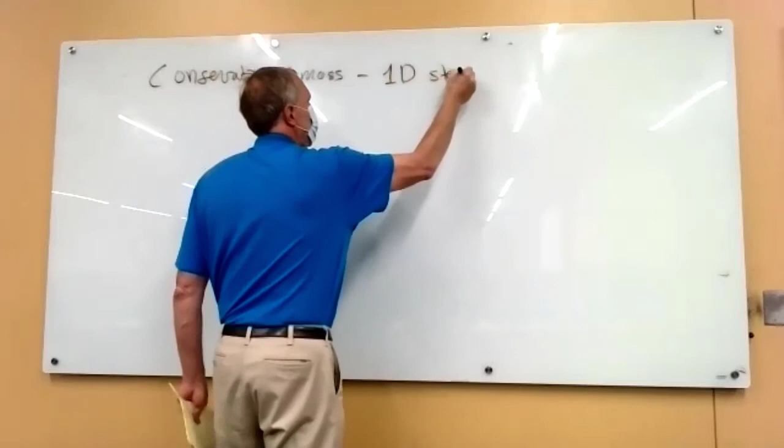We had the conservation of mass. So that was our first fluid flow equation. Remember, it's one-dimensional steady state flow. Why is it 1D? Because the pressure and density only change in one dimension as it goes down that pipe or that duct. Why is it steady state? Because they don't change in time. So this says rho at one point is equal to the same thing at another point.

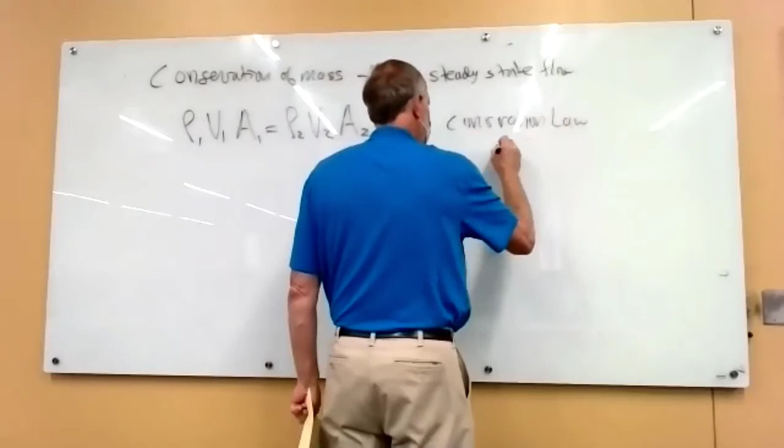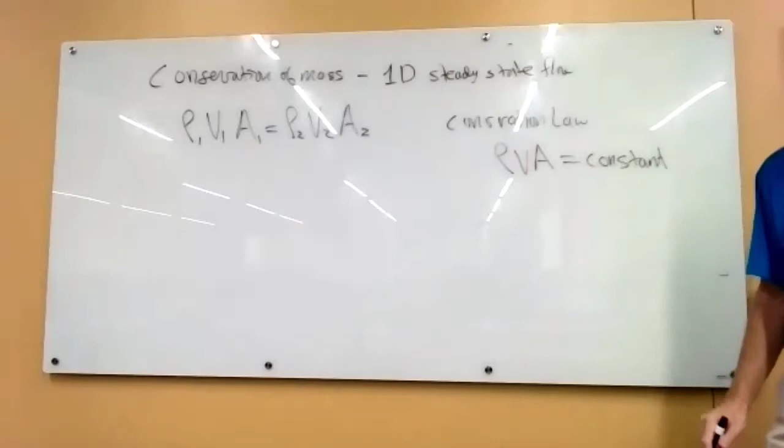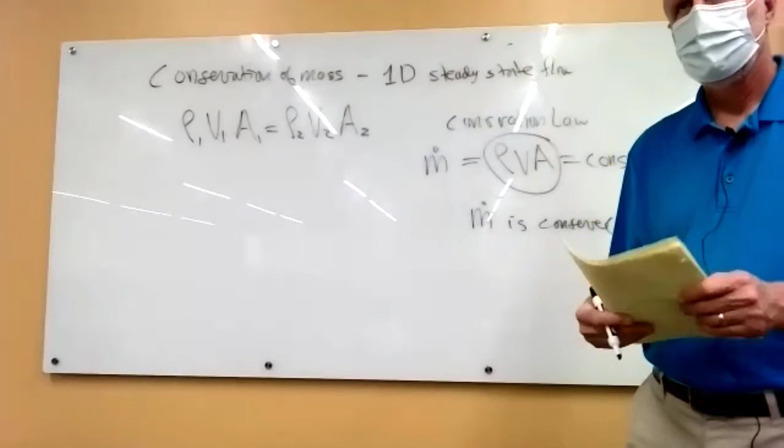Or you can think of this as a conservation law, because it says anywhere in the flow, this combination of variables is constant. So when you multiply all three of these together, that quantity, which is mass flow rate, is conserved. And that's why we call it the conservation of mass.

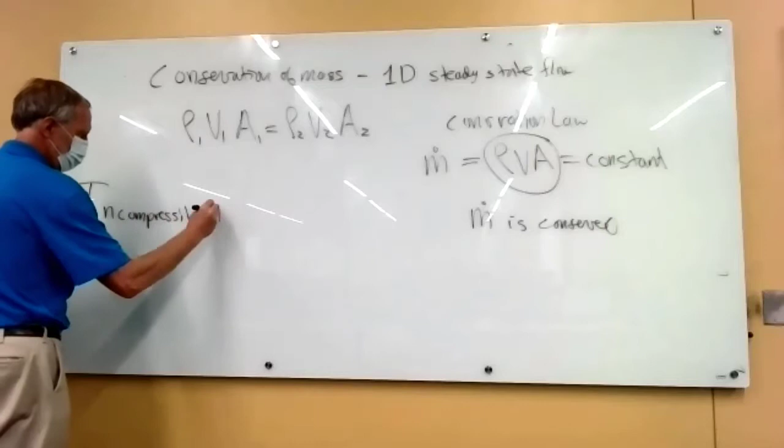And then the next assumption is we can say incompressible flow. And you may think, well, gosh, I got to keep track of all these assumptions. Again, like I said last time, you got to pick the right equation for the right situation. And so you need to state the information that led you to choose that.

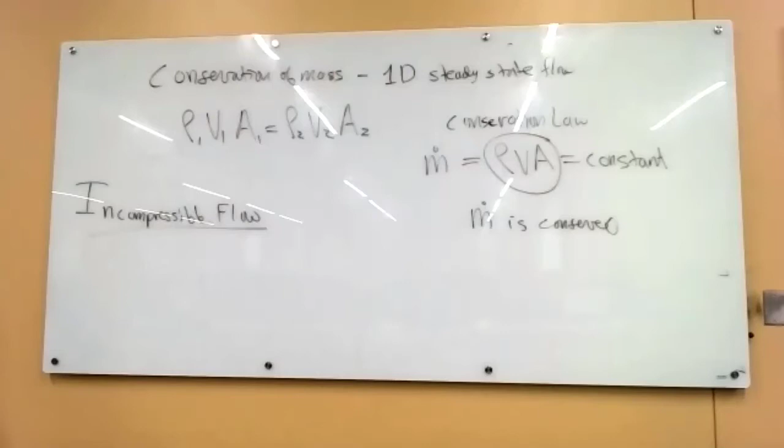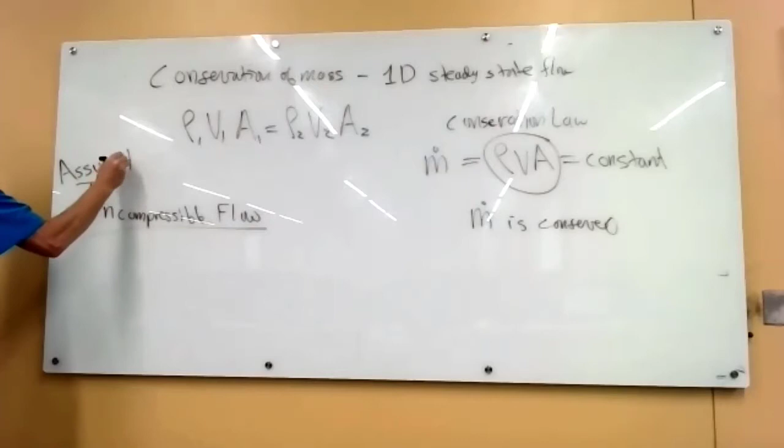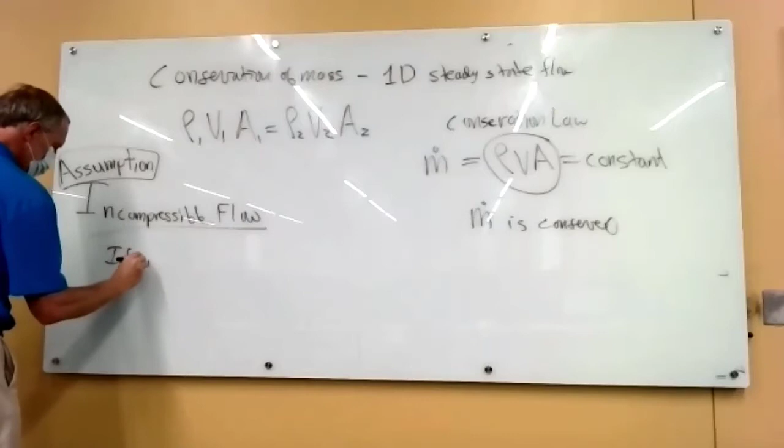All right, so this is another assumption that we can make. And the idea here is that if we squeeze a substance, which really means if we put a force on it. How about if that substance is steel? This is a steel beam. I'm pushing on it. Is it changing its shape at all? Is it compressing? Well, actually it is, right? But I'm probably bending this a negligible amount. So we could assume that this force on this beam is so small compared to the elasticity of the beam that it's not really deflecting at all. So steel, if we had a cube of steel, imagine how much force you'd have to put on that steel to compress it down. Because it's in a solid form, so all of the atoms are linked in that crystal structure. You actually have to physically push the atoms together, and it's really hard to do because the electrons are shared between each of the atoms. And so this is hard to compress.

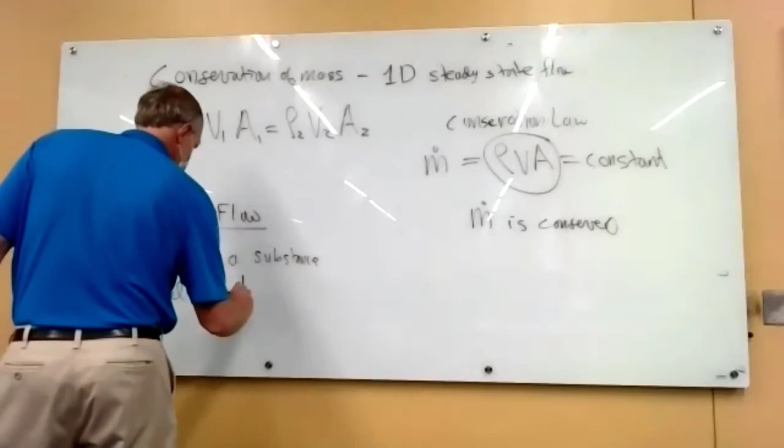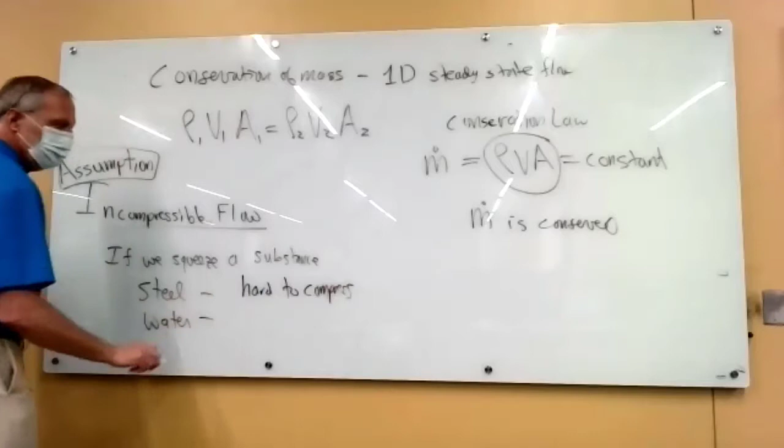How about water? Still not very compressible. It's a liquid, but even in its liquid form, the atoms are pretty close together. And so to push those atoms even closer together takes a lot of force. Can't say it wouldn't happen. In steel, you can compress it, put it in the interior of a star, it heats up, it melts, you can compress it. Still hard. So if we're having a problem where we're dealing with an airplane, which would really be a submarine in the water, we could pretty much assume incompressible.

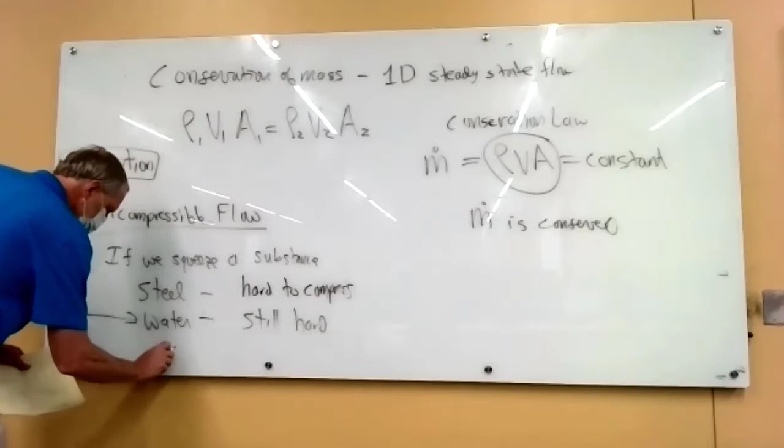Okay, how about air or gas? If you take a balloon, imagine going to Party City, one of those Mylar balloons. If you push on it, it wiggles around, but how well could you compress that down into a volume half its size? It would still take quite a bit of force, wouldn't it? You could do it because the gas is more compressible, so you need large pressure forces. So we have to make a decision as to when do we have to say a gas is compressible and when do we say a gas is not compressible?

And the whole idea here is that if we can say the density in this equation is constant, then that's an unknown that we can throw away. We don't have to worry about it.

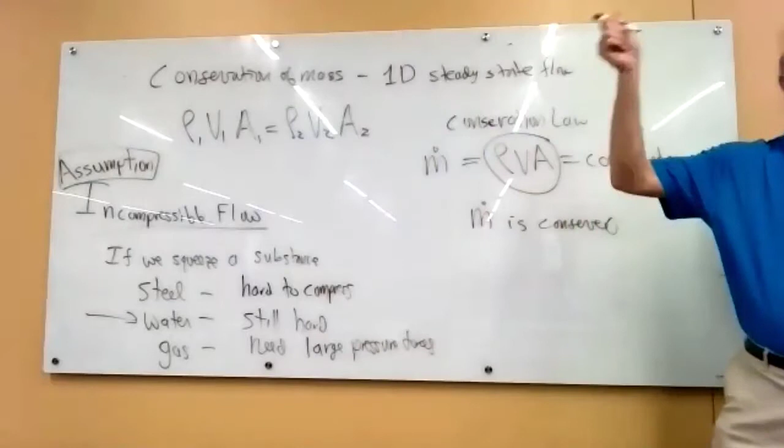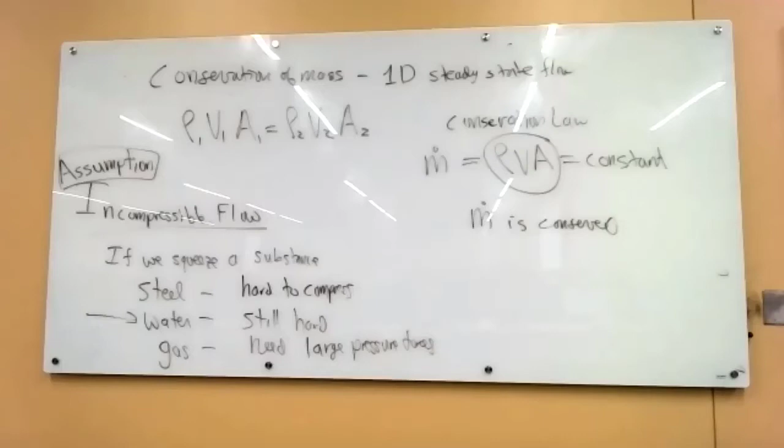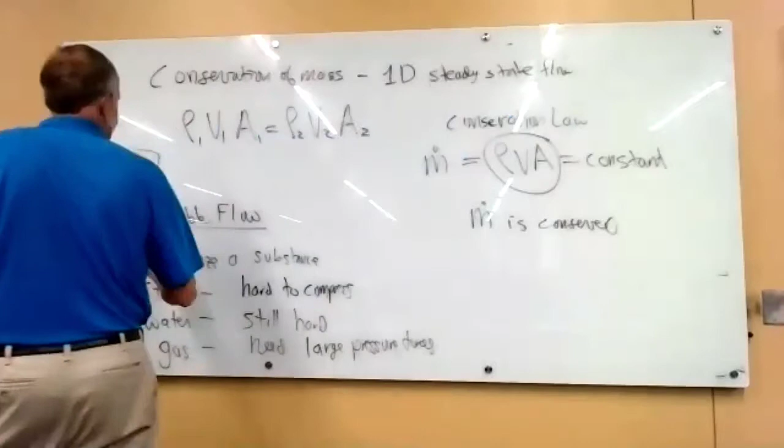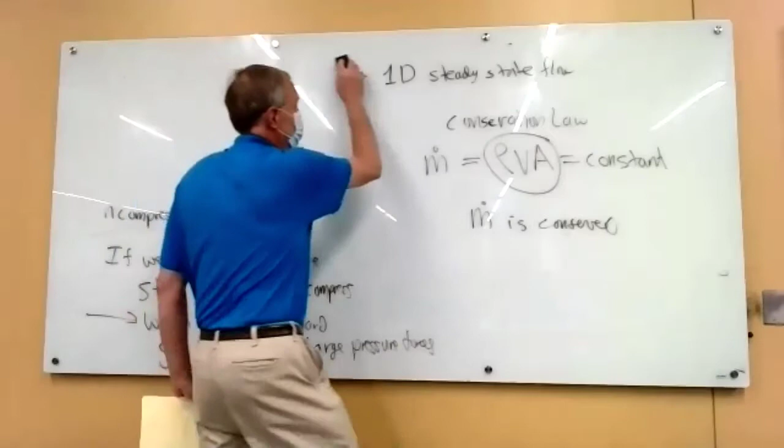All right, somebody tell me where I put my eraser. Oh, geez. You know what this whiteboard really needs? The tray on it, right? Maybe I should buy one. Go to the department and say, I need a tray. It'd make it look less classy. So who should I blame for buying these whiteboards that don't have trays? No, actually, I did it. Some of the other teachers that teach in here wanted whiteboards, and these looked really cool. I just didn't notice that they didn't have trays. So I need to fix that.

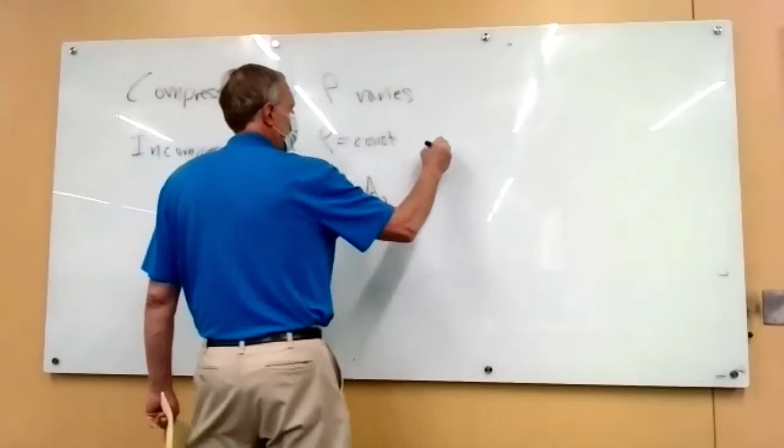All right, so if we have compressible flow, then rho varies. Whereas incompressible, rho is constant. So in that equation, we can say rho 1 equals rho 2, and we can cancel. We don't just write the equation down without rho in it. I want you to write this equation down, and then if you assume incompressible, write 'assume incompressible flow,' and then cancel the densities out, so you remember you did that. Not only that, but you remember this equation, so if you ever have to do compressible flow, you don't accidentally get the wrong equation.

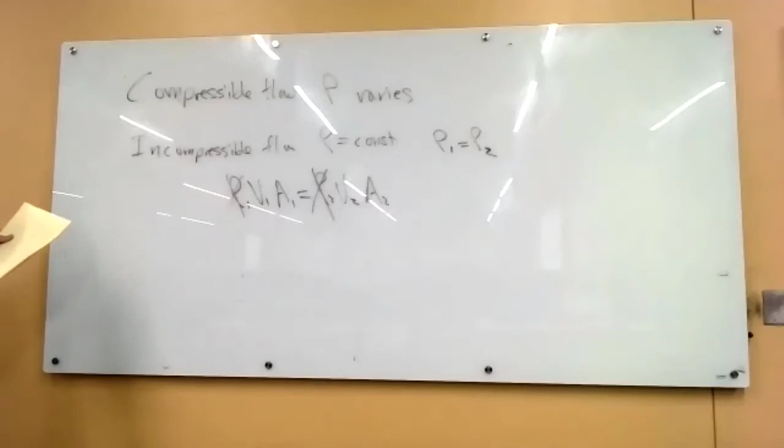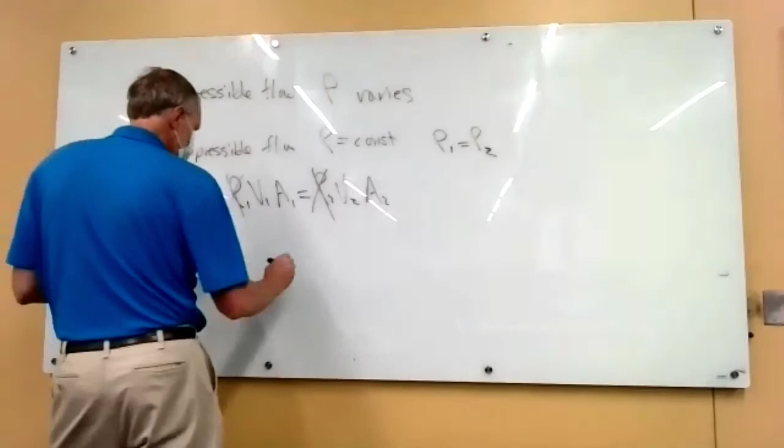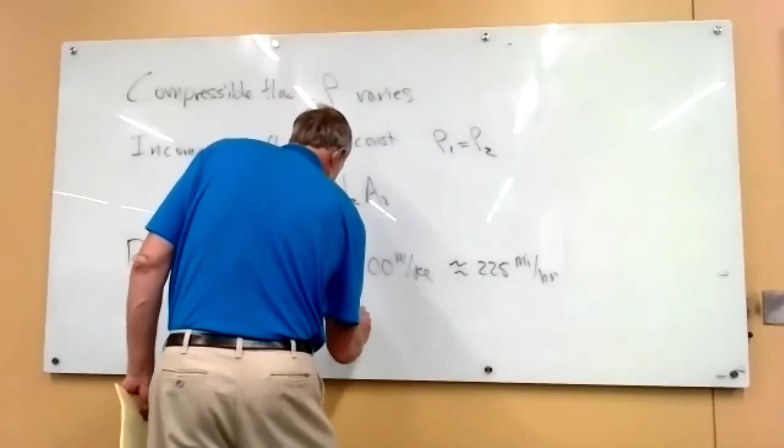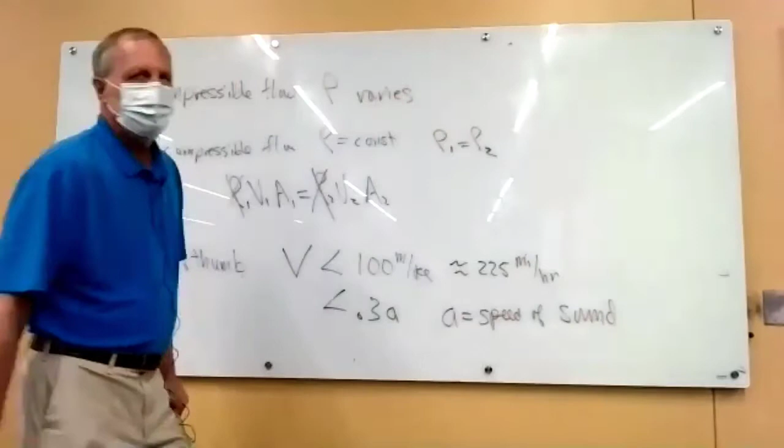All right, so the rule of thumb, and we'll justify this later, is if the velocity is less than 100 meters per second, that's easy to remember, 100, right? A century of meters per second, or about 225 miles per hour. And all of these are really based on them being less than 3/10 of the speed of sound. And why the speed of sound? The speed of sound is related to pressure disturbances. So this is related to how much speed you have that can compress the flow due to the pressure forces pushing in on it.

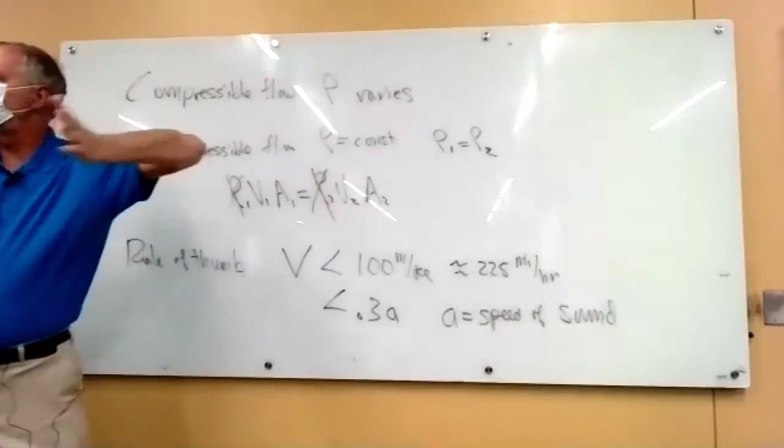All right, how are we doing on time? 12:58, I see it on the computer.

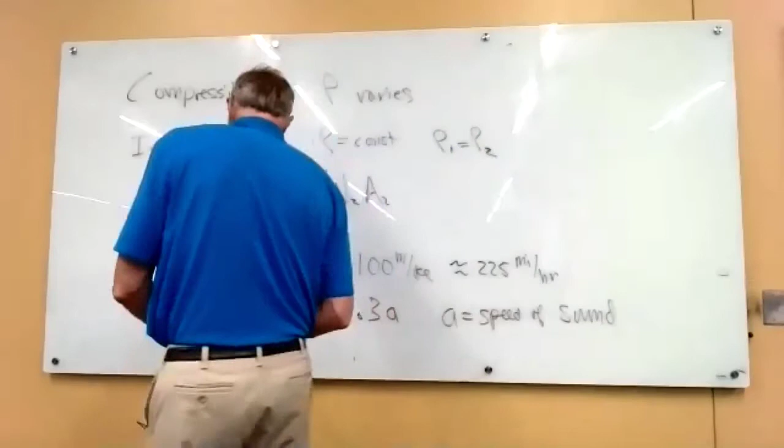So these are definitely worth memorizing, because these are kind of the cutoffs. If you get higher speeds in your flow than those numbers, then you have to assume compressible. If it's below that, this is really what could be called low speed flow.

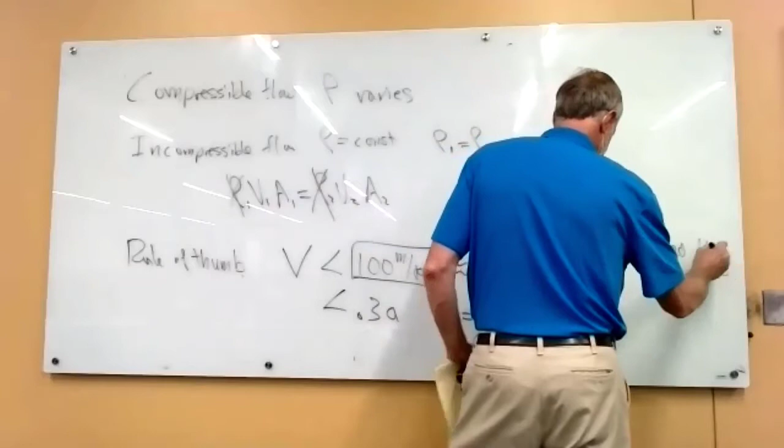All right, so let's do an example that everybody has done experimentally. Everybody have a garden hose now, or grew up in a house where you had a garden hose? Right, so you turn the water on, the water shoots out the end of the garden hose, and it's not real fast. If you want to wash your car, what do you do? Yeah, you put your thumb on it to make the hole smaller, or you buy a mechanical device called a nozzle, that takes the diameter of the tube and narrows it down.

And from conservation of mass, we know that if the area goes down, then the velocity goes up. So that's why the nozzle is there.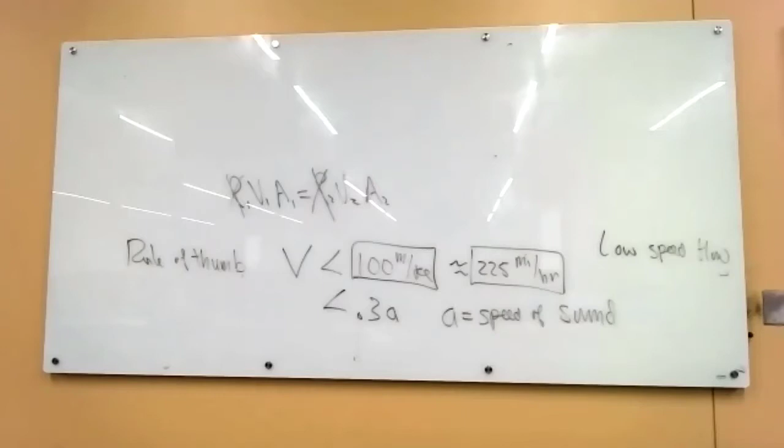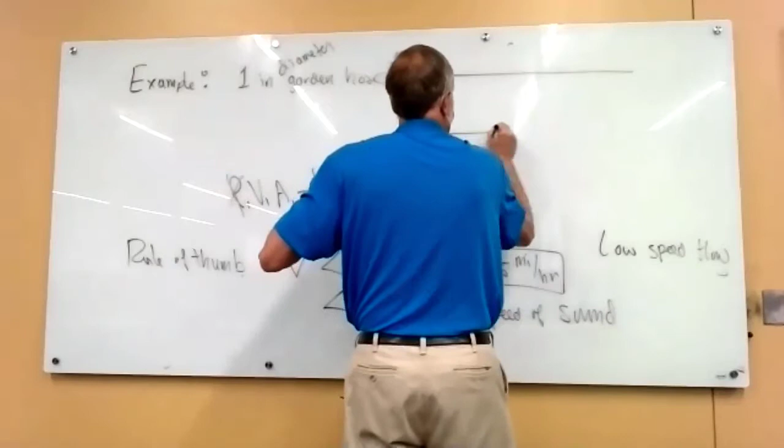So here's an example. This is a pretty small nozzle. So, 1-inch garden hose, 1-inch diameter, or a 1/2-inch radius. And the reason we need to know that is we need to know that area that's going to go into our formula. All right, and it has a nozzle. So here's our garden hose, this is 1 inch. And then the nozzle goes down, and this has a diameter equal to 1/8 of an inch.

So typically in your book, the problem will be written like this: you have a 1-inch diameter garden hose that you bought at Sam's Club. It's the Members Mark brand that says it's kink resistant and kink free. And you get it home and you put it in the front of your house and it kinks up all over the place. Does that sound like something I've done? Yeah, I have a hose and the thing kinks all the time. Okay, so the problem doesn't include all that other stuff. It says a 1-inch garden hose that has a nozzle put on the end that's 1/8 inch in diameter.

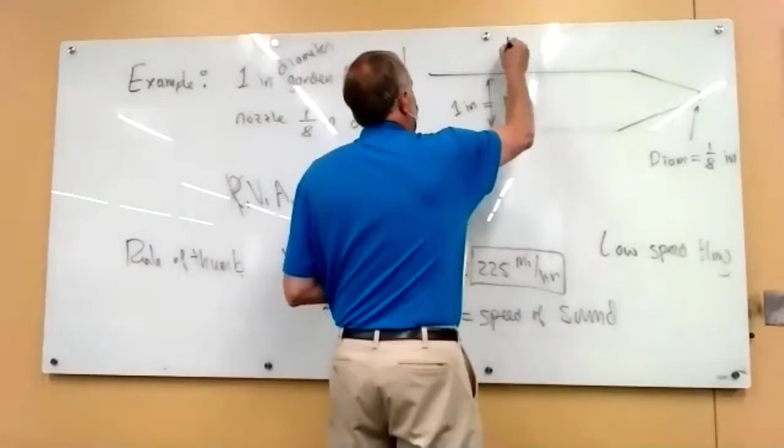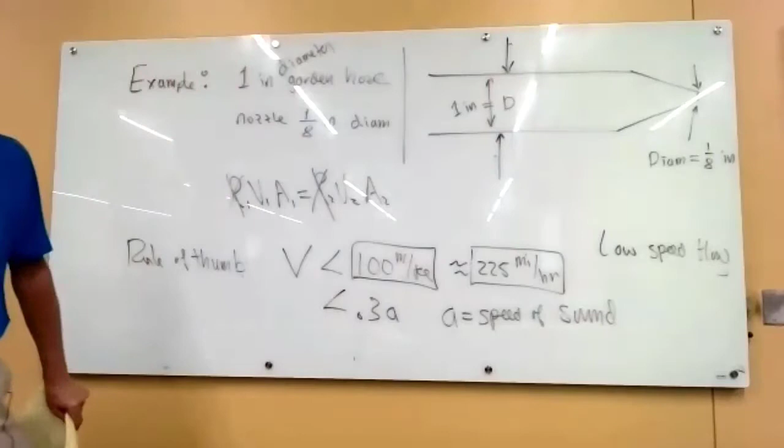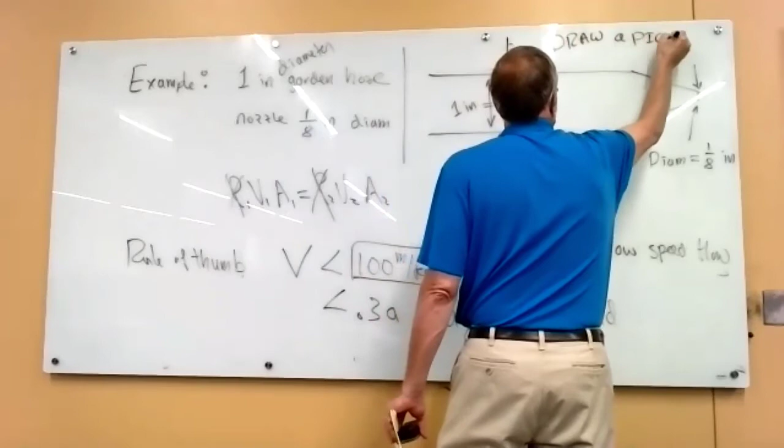What did I do over here to the right of that? What is this? It's a picture or a figure, right? Just like in dynamics, you drew free body diagrams. In this class, draw a picture labeling the different points in the flow where you know stuff. And that helps you think about the problem. You look at the flow, you look at the areas, and you go, oh yeah, I think I'll use conservation of mass. So in the homework, whenever you're given a word problem like this, draw a picture. And I will actually grade that. I will look for the picture and give you points for drawing it.

Now, we haven't done that up to this point because the homework you're working on now says at a point in the atmosphere, the pressure is this value and the density is this value. I guess the picture that you could draw would be... right? And so I haven't really emphasized drawing pictures yet because we haven't started talking about flow going through things. But if you can at all draw a picture, draw a picture.

All right, what's the fluid? I haven't said, have I? Liquid iron. Compressible or incompressible? That's going to be some serious garden hose if it can handle liquid iron, right? What was your idea? Grape juice, so that works. So, I mean, that could happen, right? We're at a winery and they have a tank filled with grape juice and they need to transfer it to another tank to make wine.

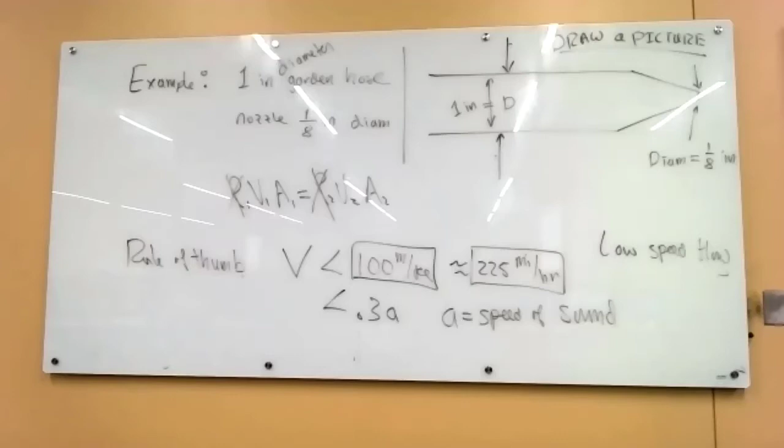So I haven't said, so we need to know more information. This is going to be a garden hose, so you would almost assume that it's hooked up to the city water supply, although not necessarily. It could be mercury, that would work, it wouldn't melt the hose like the liquid iron would. Well, what would you use? You'd have to use like a ceramic or some other metal that would not melt at the temperature of liquid iron.

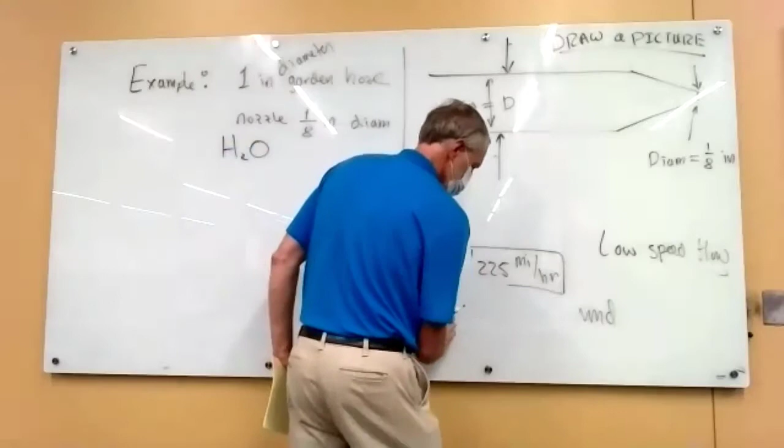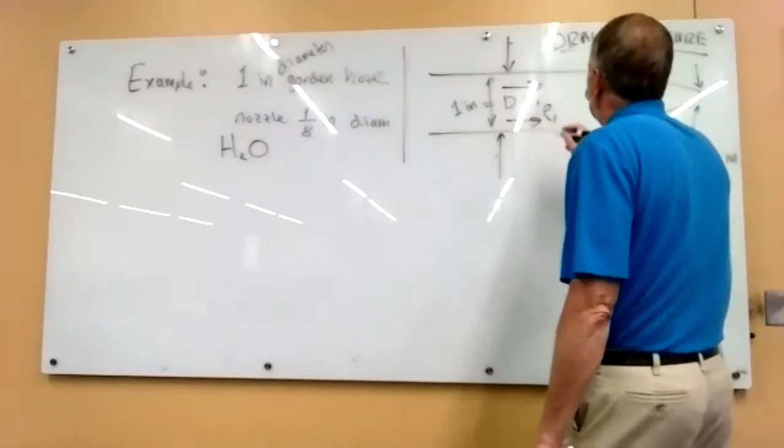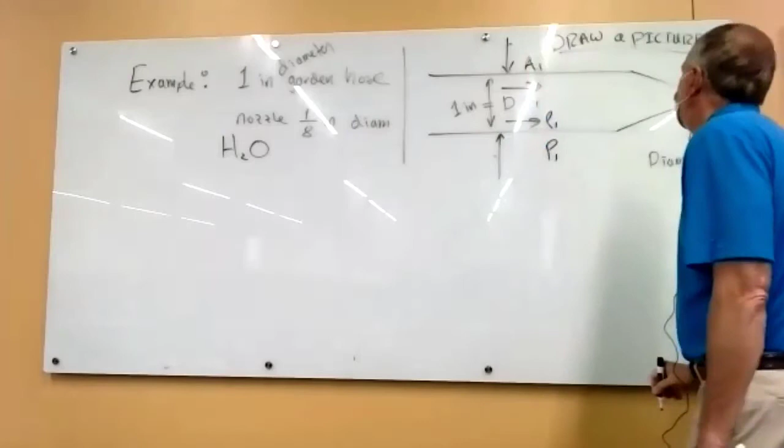All right, so we look at this and we go, okay, it looks like we're going to say that the flow velocity V1, Rho 1 is here, and there's going to be an area A1 here. So I'm starting to label the variables that I need. These are the fluid variables. I have a velocity, a density, a pressure. And then over here we have a velocity, a density, a temperature, and a pressure.

So what do we want to do with this? Well, right now it's not stated in the problem, but what we want to do is find out how much faster, oh whoa whoa whoa, there's not ones over here. How much faster is the velocity here than here? How much speed up do we get? So we want to find the ratio of V2 to V1. So that's the problem.

So we draw the picture. We label the flow variables. Well, there's some flow there. There's some density, pressure, area, density, temperature, pressure, area. We want to know velocity differences. What do we know in this problem? I haven't given you the pressure, the density, or the temperature. So what do we know or can we calculate? We can find the areas, right? Because I gave you the dimensions here.

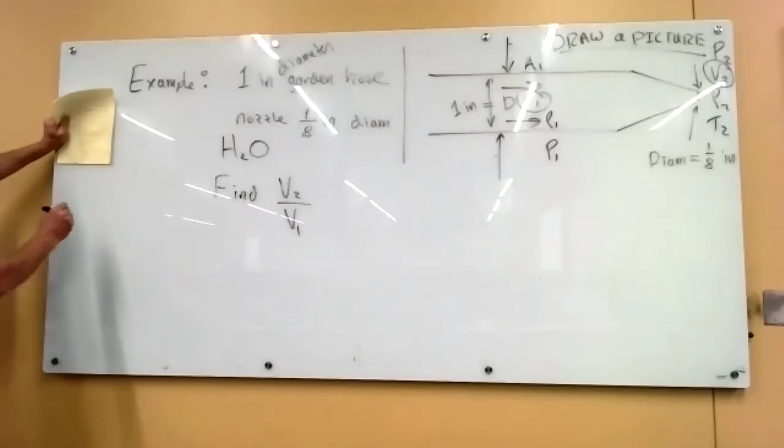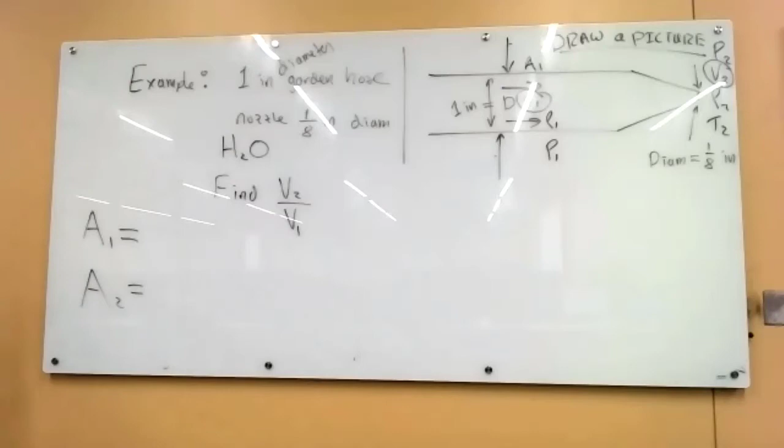So you guys do this. What's the area 1? What's the area 2? I guess we ought to decide what units we want to use. It's given in inches, so let's find the area in inches squared and see if we're going to be okay.

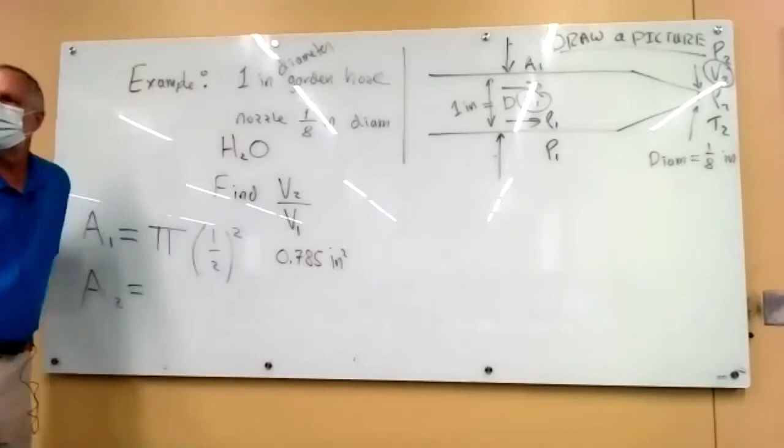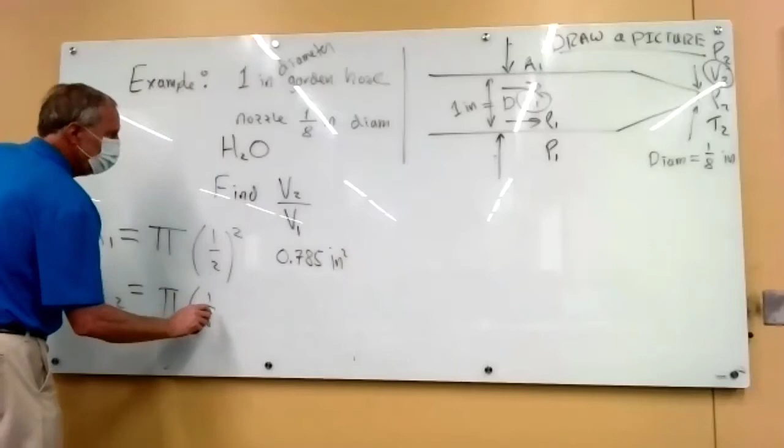0.785. Do I understand you right? Did I hear that right? Okay, how about the other area? It's going to be pi times 1/8 divided by 2.

So what do we get there? You have to shout it out loud. 0.012. Did you guys all get that?

Is that good? All right, so we know areas, and then we go, all right, what equation do we know that has areas in it? How about ideal gas? P1 equals rho 1 R T1, that's really the only equation we know so far, right? That we've used. No, I don't see area in there. I see pressure. I don't even see velocity, so that's a bust.

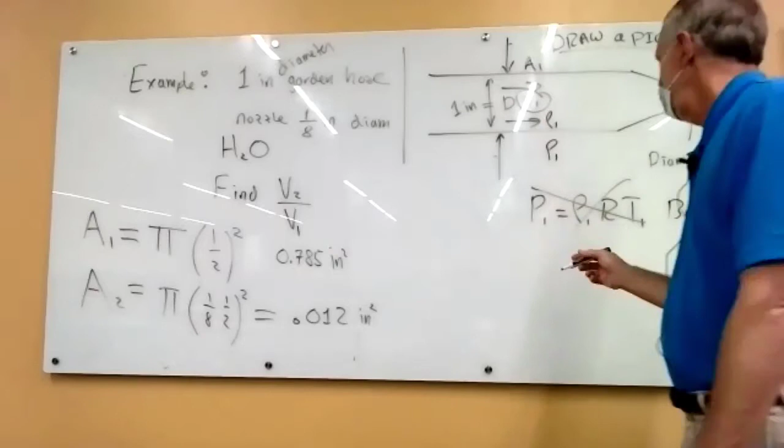Then we go, yeah, conservation of mass. That has area in it, and it has velocities, right? Rho 1 V1 A1 equals rho 2 V2 A2. Assumptions, 1D steady.

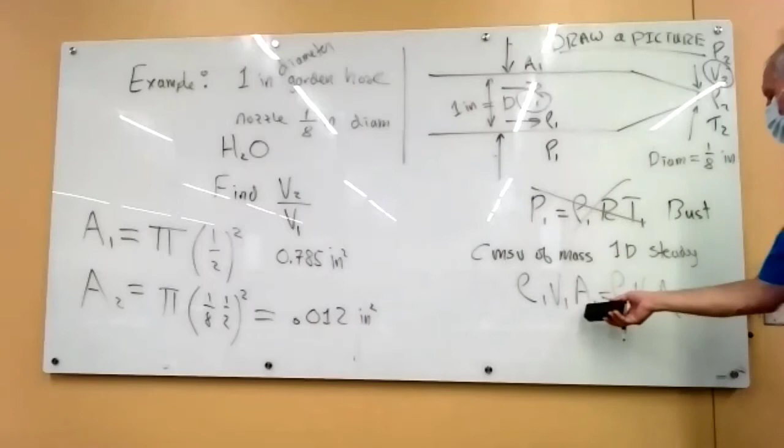Now we go, okay, I want to know V1 and V2. We're looking good. There's V1 and V2. We know A1 and A2, so we can check those off. We know that, and we can solve for this ratio, but I don't know the density.

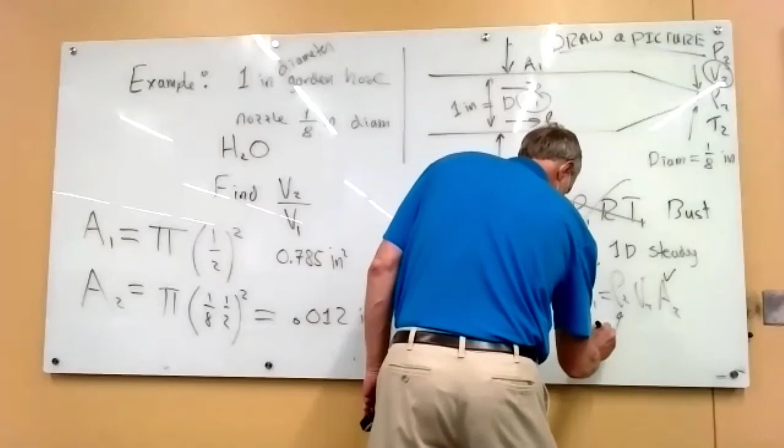So I'm going to assume an incompressible flow because it's going to make the problem easy, right? No, the reason we assume incompressible flow is that it's water. So you have to say that, assume incompressible flow, which means that rho 1 equals rho 2, so you can cancel those out.

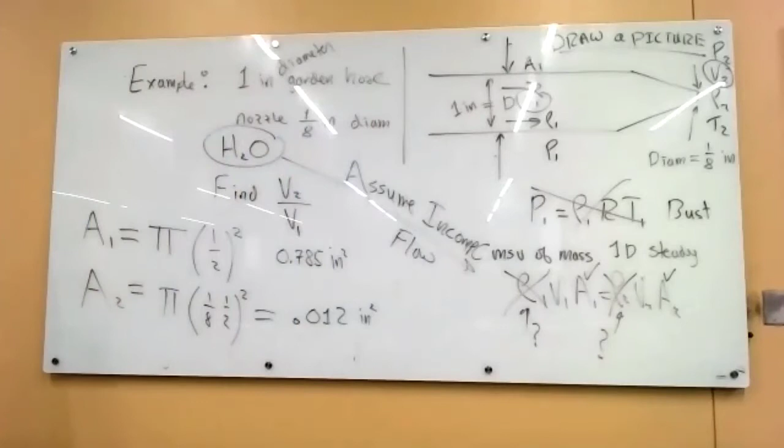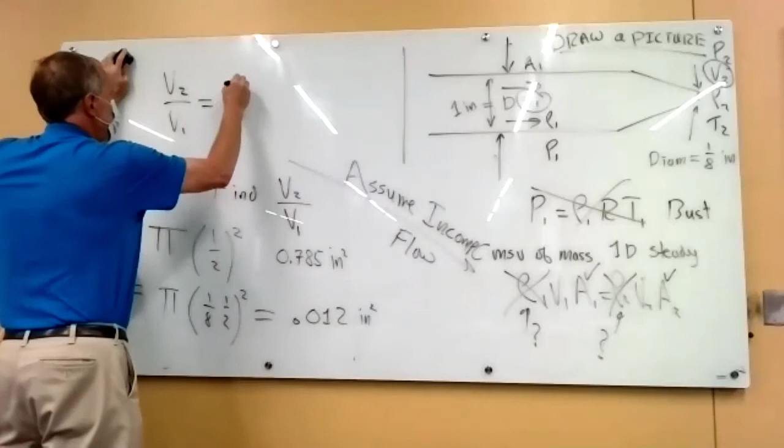So all that's left to do now is just ratio these two numbers. So what do you get? Somebody punch that in. So V2 over V1 is, it's going to be A1 over A2. So what do we get? Somebody have that?

That's because I solved that equation. I moved the V1 over there, the A2 over the other side. Actually, I can calculate the answer. I made you do this stuff, but we can actually just ratio these two, right?

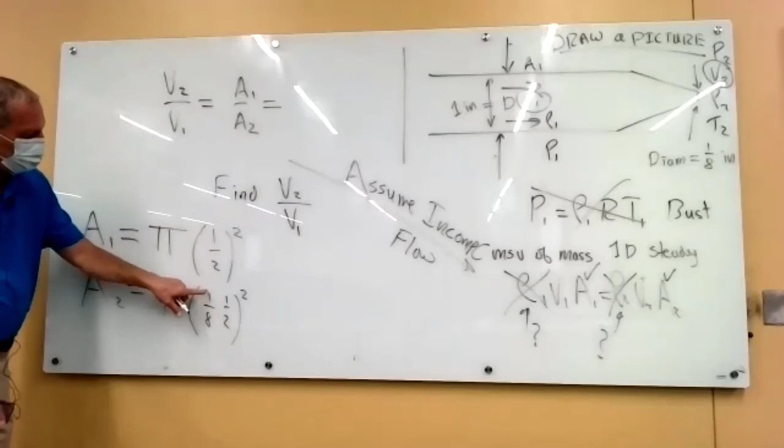And the 1/2 cancels out with the 1/2, and we get 1/8 squared. So it's 64. So that's decent. The flow coming out of the nozzle is 64 times as fast as the flow coming in.

So that's how you use conservation of mass with the assumption, and then you can solve a problem. So what is the value of V2? How fast is the flow coming out? I need to know V1, right?

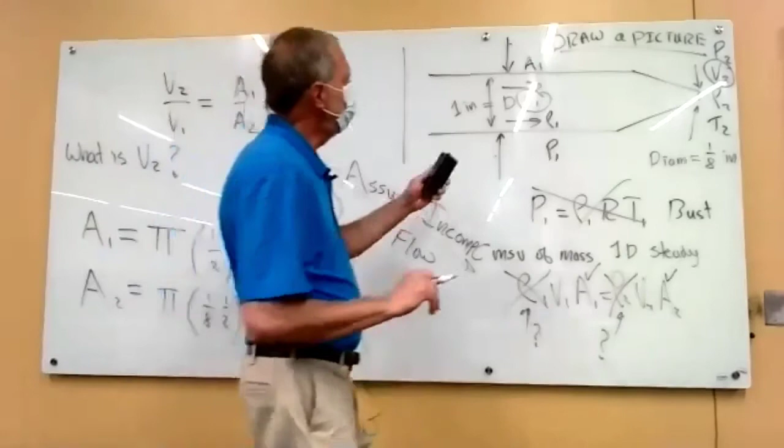So how does this problem, how is it going to know V1? So there's a change in velocity. We're saying the velocity here is a lot faster than the velocity here. So if I have your car and it goes from 10 miles an hour to 100 miles an hour in 10 seconds, what causes that? Fundamentally, physics. Acceleration from what? A force, right?

So looking at this, the velocity goes 64 times as fast. There's got to be a force causing that. What's the force? In the fluid problem, there's not a 250 horsepower engine driving this, right? Like a car. There's not a jet engine. What is the force that's going to drive a little piece of fluid right here down the pipe and go screaming fast out here?

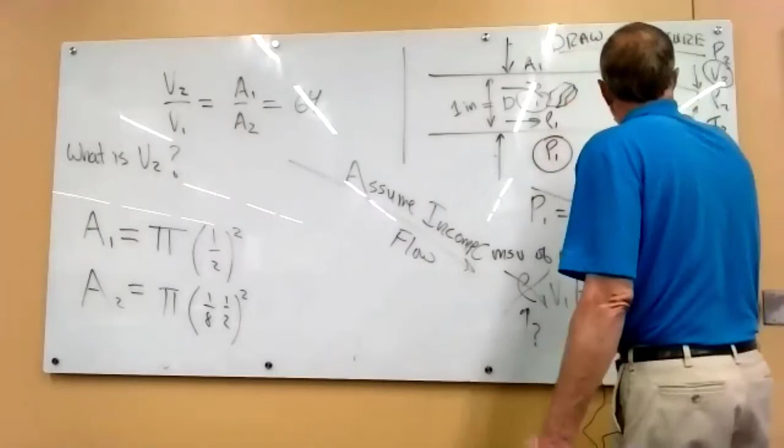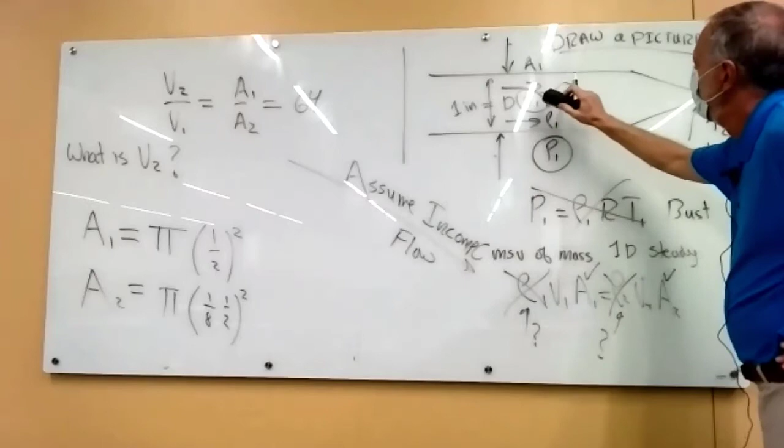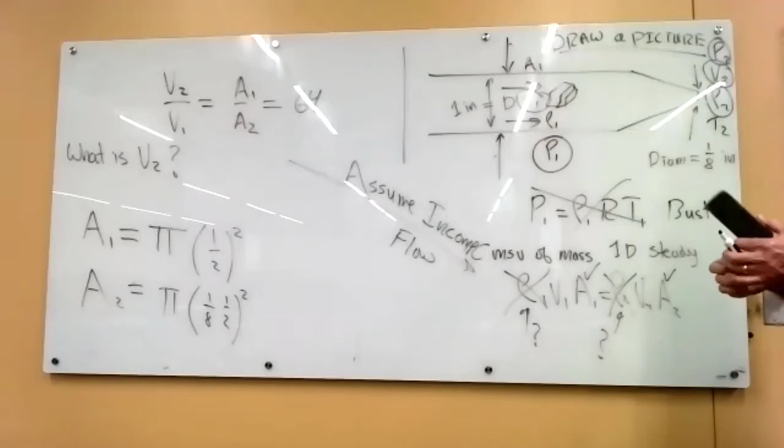Do you see a force variable here? The pressure. So there's a pressure here and a pressure here. That's density. Pressure here. So what that says is the only force available is the pressure. So there must be a pressure drop from here to here because there has to be a net force to accelerate that fluid. And so to solve this further, we need another equation that talks about pressure difference and velocities.

So that's the second principle, which is Newton's law for fluids.

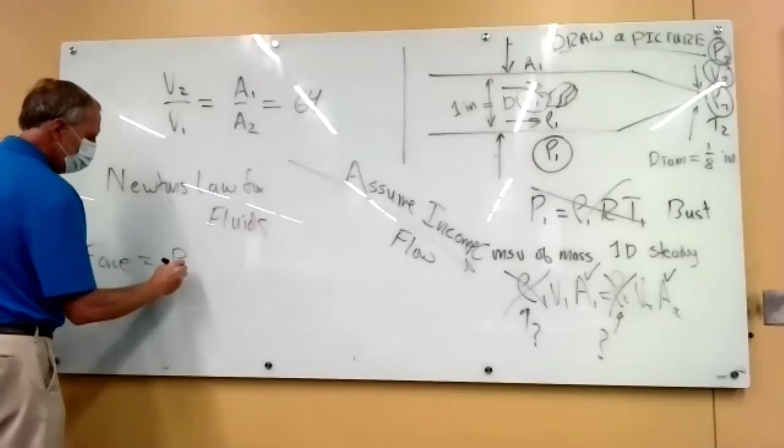And what is the force? It's going to be a pressure drop, pressure difference. And what's the mass? It's going to be the density times the volume. And what's the acceleration? It's going to be the change in velocity over time. And so that's the equation that is going to give us the relationship between velocity so that we can solve that extra question we have.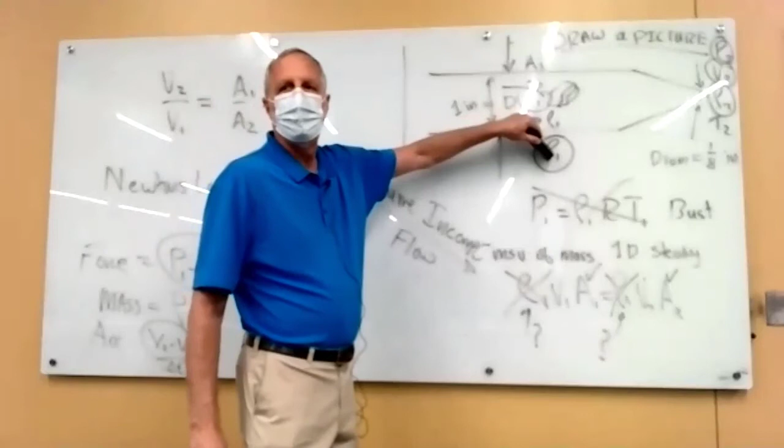So really we'll need to know, well, what pressure does the city supply for the water supply? And then out here will be atmospheric because that's where the water's coming out the other end. But we need to do this. So this is next.

All right, so next time we'll start that. We'll also do an example of air that's a compressible flow, and I'll show you how you can solve that problem. But I have this real quick video I want to show you.